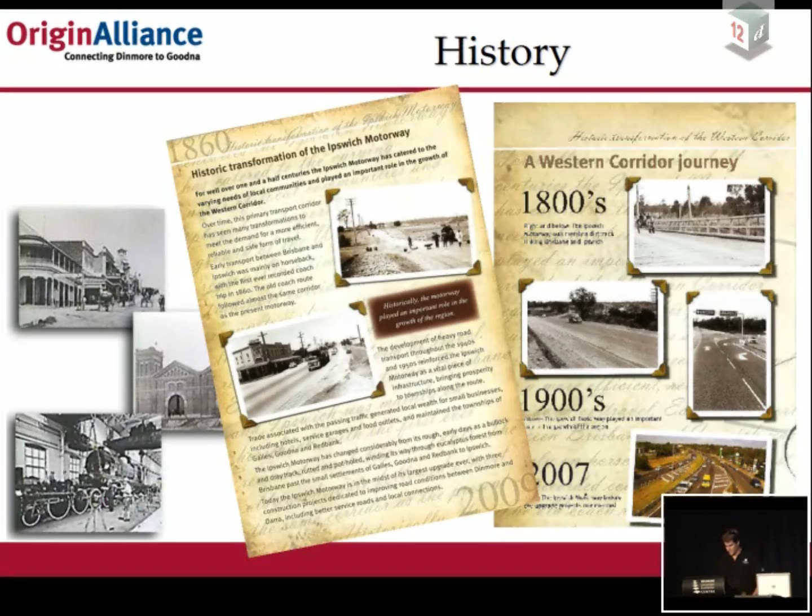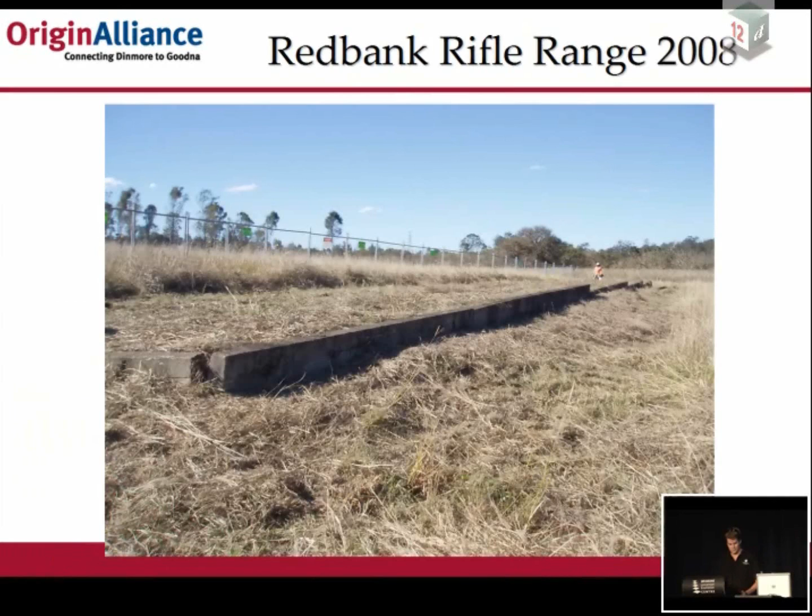The project is located approximately 25 kilometres from Brisbane CBD and consists of 8 kilometres of motorway widening from 4 to 6 lanes and has a provision for 8 in the future. It also includes over 15 kilometres of service roads. The project starts at the tie-in with the Ipswich Logan Interchange project, which is newly completed at Goodna, and finishes at the tie-ins with the Cunningham Highway, Warrego Highway and Brisbane Road near Dinmore.

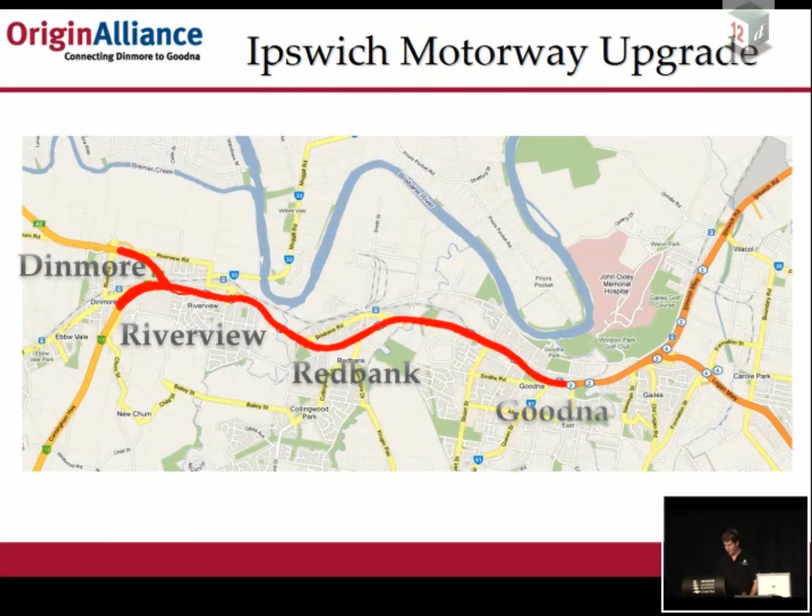We have a few layout photos here of the proposed design from the urban design guys. This is the western end of the project. We've got Warrego Highway to the north, Brisbane Road to the west and Cunningham Highway to the south there. Currently there are some right-hand exits. The current design is going to be all left-hand standard TMR exit off-ramps.

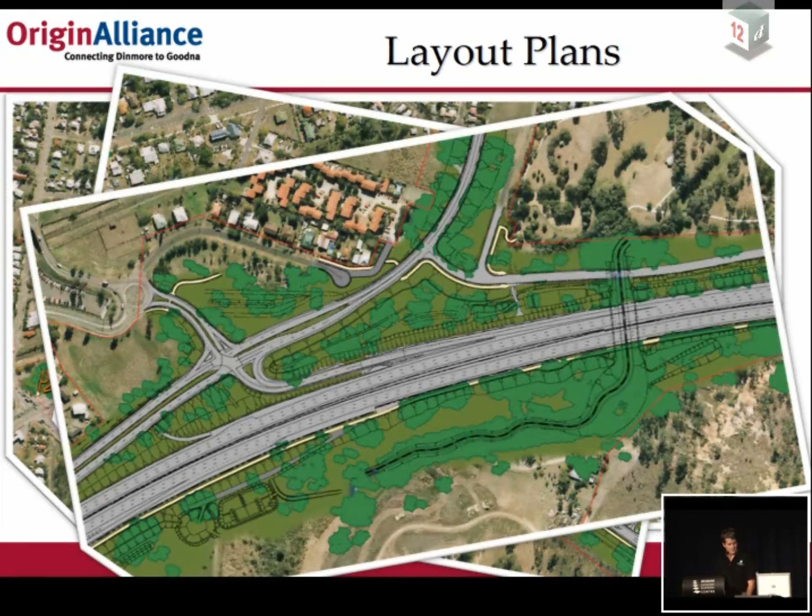We've got Redbank Shopping Centre in the centre with Mine Street Interchange. We've got the Redbank Sports Complex down to the bottom right here and a couple of local service roads. We've got the Goodna Creek rehabilitation because the new motorway dropped over the old one, and one of the on-ramps onto the motorway. And this is at the eastern end of the project at Goodna. We've got the Church Street Interchange and numerous pedestrian ramps.

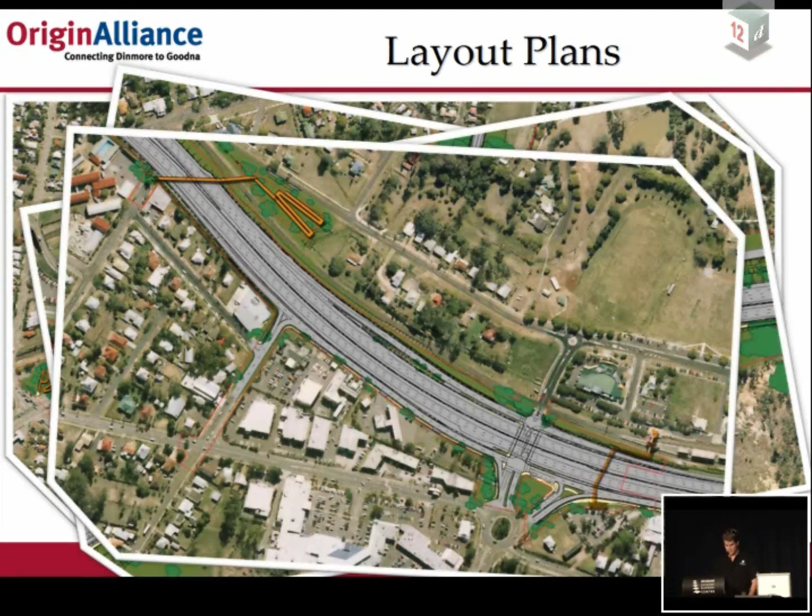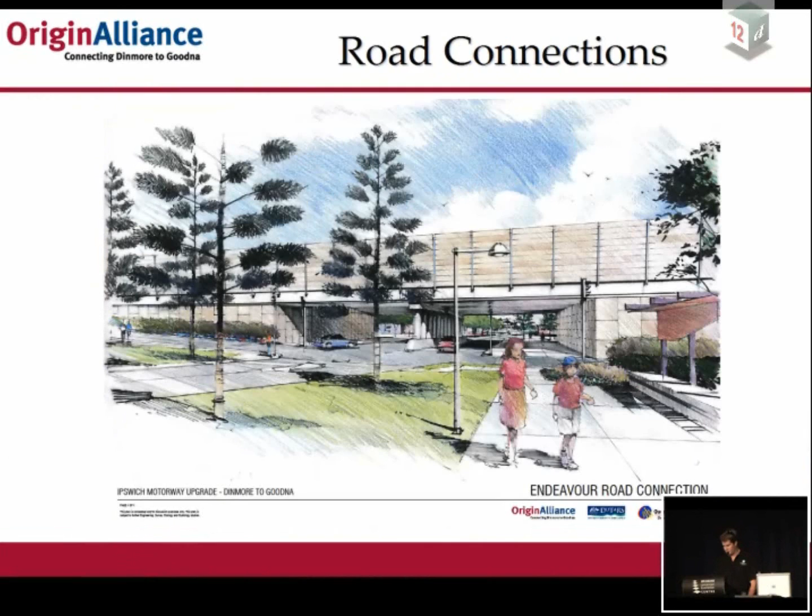Included in this project, obviously there are some major interchange upgrades with new and improved pedestrian and cycle paths. There will be new road and pedestrian bridges built for cross-motorway traffic, with numerous connection roads to separate the local and regional traffic. I think this is to take some of the 80,000 vehicles a day that they have travelling through the site.

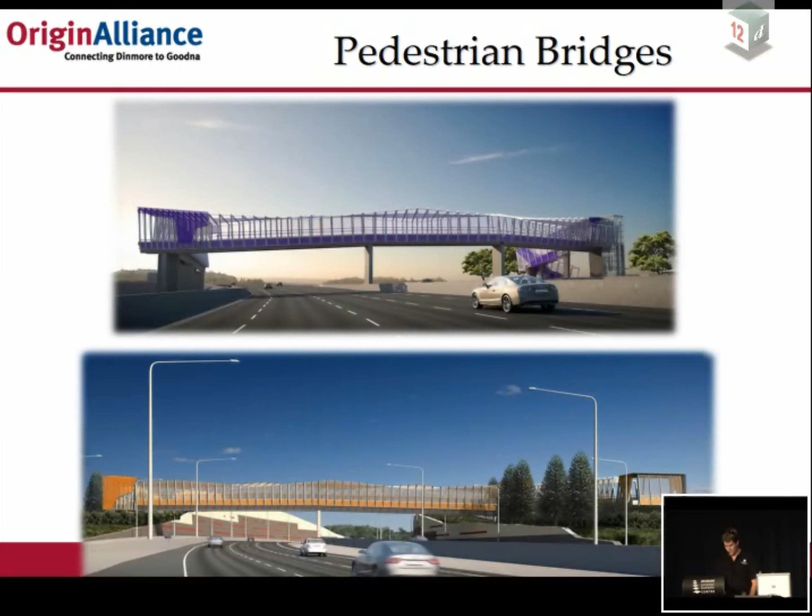A unique component of this project is the infilling of the abandoned coal mines in the areas of Redbank and Goodna to stabilise the ground. To undertake this process, this specially built concrete mixing plant was built. This tall white structure is visible on the southern side of the motorway and has been designed to produce the grout paste which is being injected into the old abandoned coal mines.

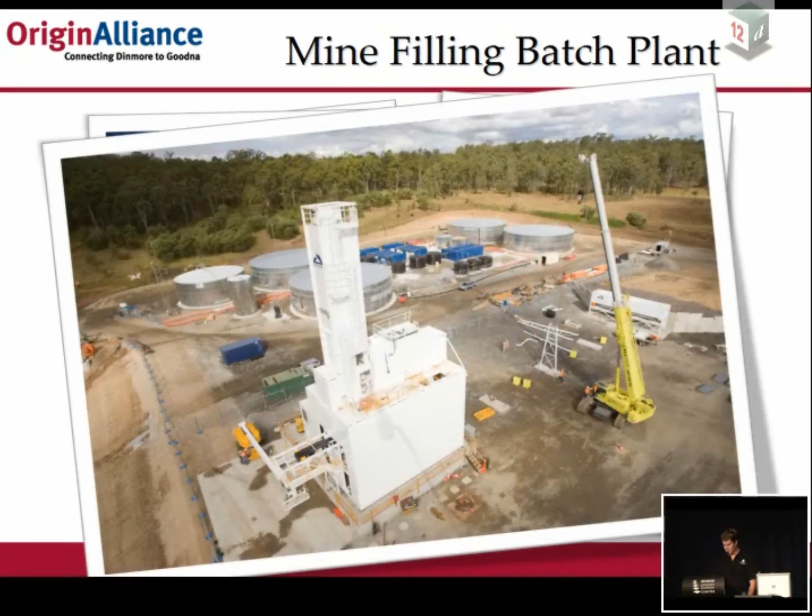The plant is capable of producing 2,000 cubic metres of paste product per day. It's transported to site in concrete trucks. The paste is then discharged under pressure into the base of the mines, filling the voids and stabilising the ground beneath the new motorway.

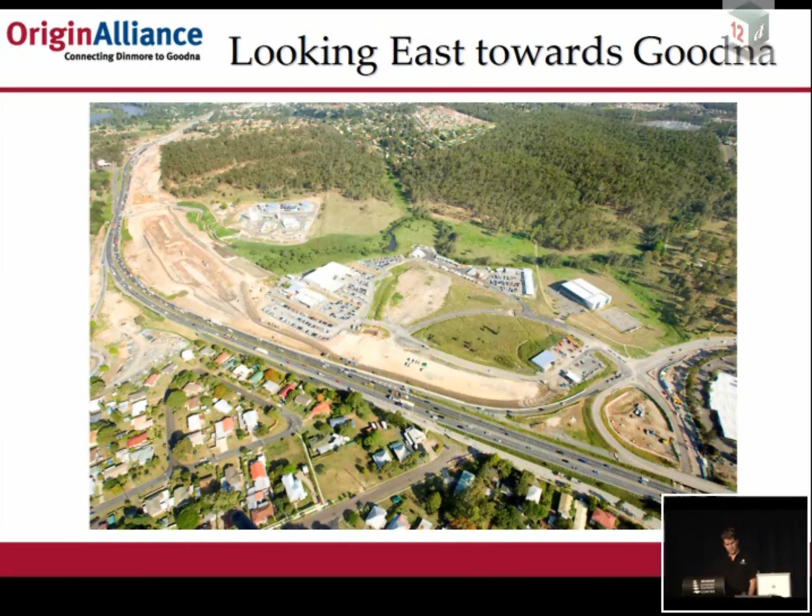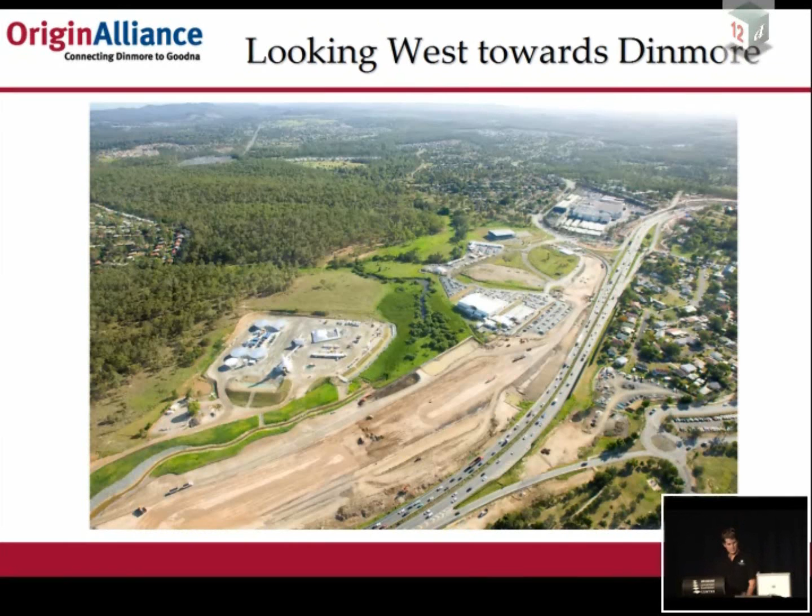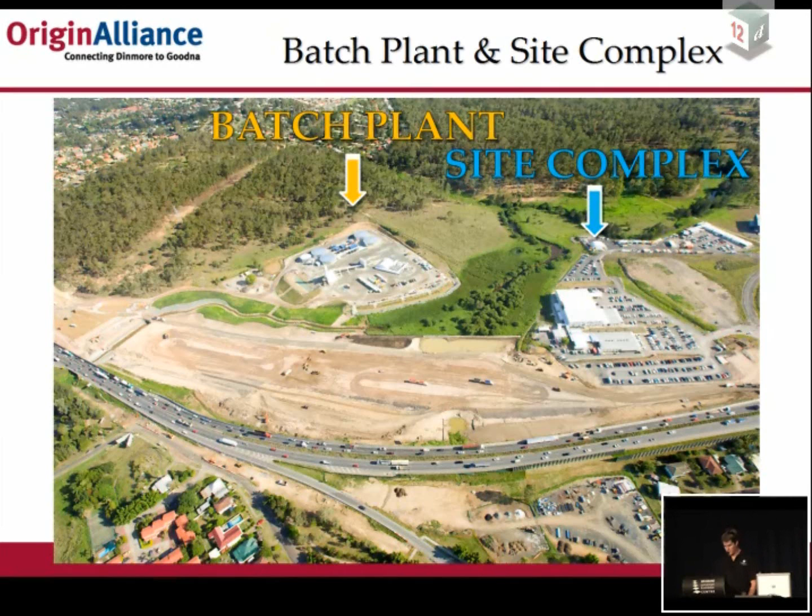At the start of 2009, the Origin Alliance relocated the design and construction staff from the CBD to the construction site office at Redbank. This purpose-built complex allowed for better collaboration between the design teams and the construction teams. And I believe this has been beneficial for the designers to be able to step out on site at the blink of an eye and go and visit the issues present on site.

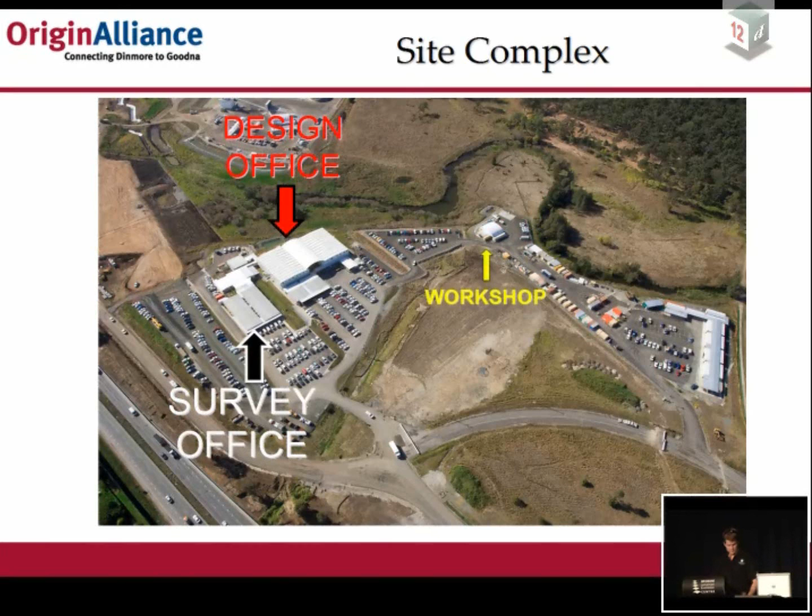Currently, the site office contains over 350 staff, 130 of which make up the design team. So the design team comprises the geotech, PUP, drainage, drafting and roading engineers. At the peak of the project, we probably had 10 road designers on board, so we had a combination of software users.

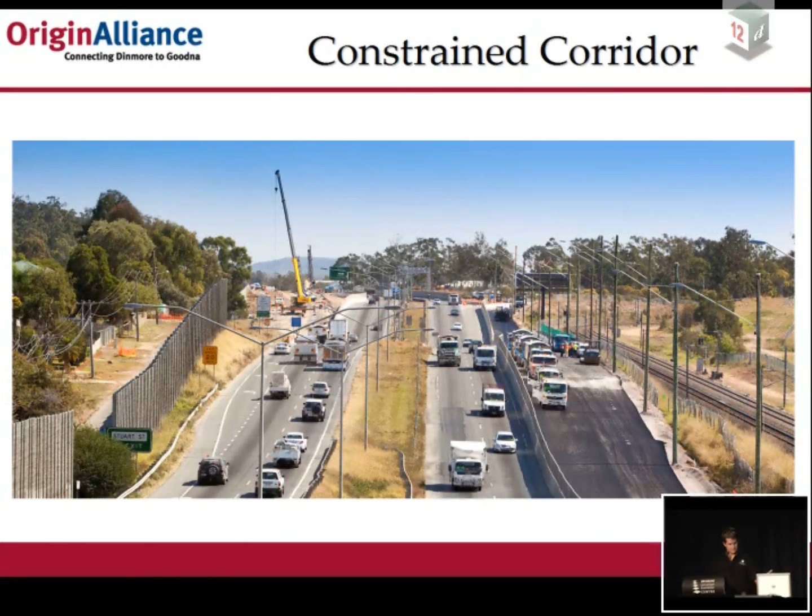The Ipswich Motorway corridor, as you can see, is incredibly constrained between numerous schools, houses, abandoned coal mines, shopping centres, and we couldn't really call it constrained if we didn't have a Queensland rail corridor to contend with. This was a couple of months ago, early December I believe, and it's a new side track, if you like, to push the westbound traffic across so we can start the motorway construction.

So this is where the detailed design project gets interesting. We split the road design across two different software programs, 12D and MX. Now I can only guess what you're thinking, but we managed to stay civil towards each other, and we worked together to create a complete model.

At the project startup, we investigated completing the design model in three ways. Firstly, it was the traditional MX environment, which has a long-running history in Queensland motorway design. But this was at the peak of the design demand in Brisbane, and we couldn't find enough experienced designers.

Secondly, we looked at a complete 12D environment. Now, as we all know, 12D is new to detailed motorway design, and I think we're looking to have some experience shown and some industry standards set. So we also struggled with obtaining some experienced 12D motorway designers.

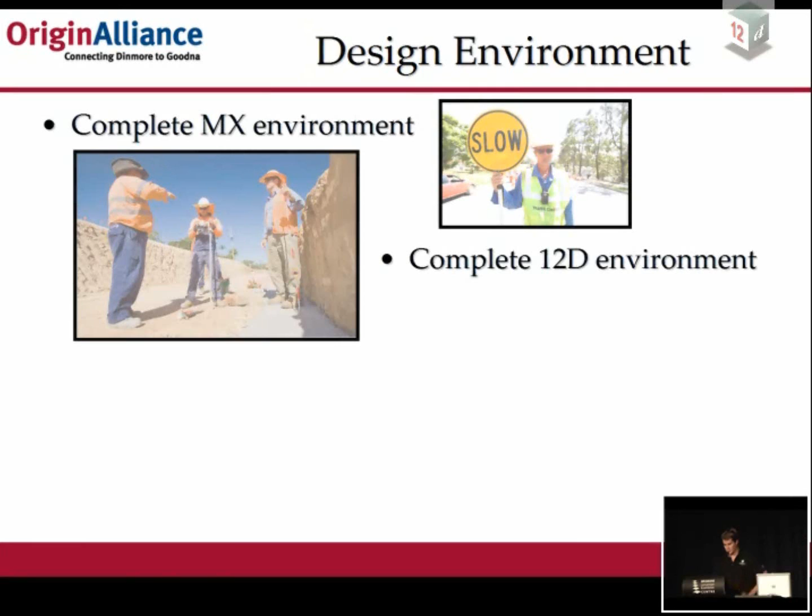So thirdly, we came to a combined environment, and this was to get the benefits out of both programs. Obviously MX has a long-running history in motorway design, but we also wanted to look towards the future and develop 12D.

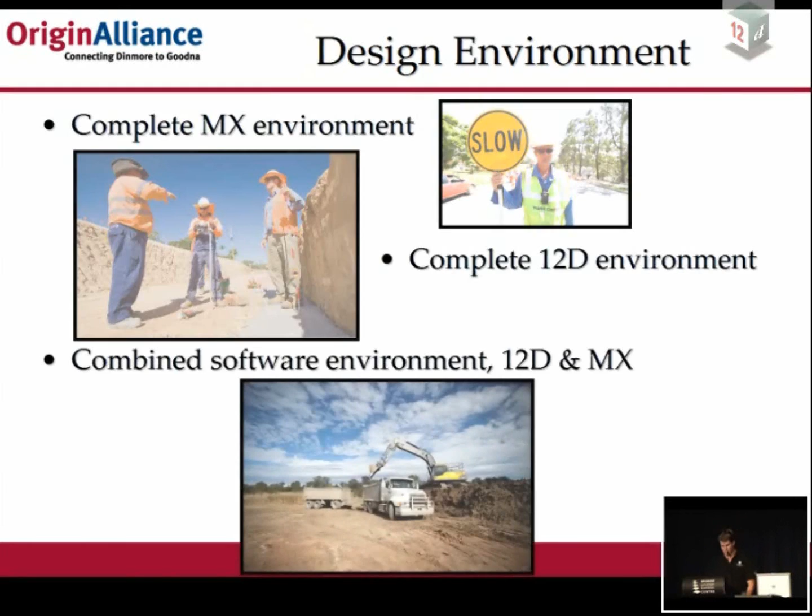The 12D MX split enabled the road team to overcome a few issues we encountered. One of them was resourcing. I mentioned that we struggled to get enough experienced staff in either MX or 12D. We had the issue of the lack of experienced 12D motorway designers available within the industry, and also an unknown 12D capability on delivering a large detailed design motorway project.

But on the other end of the scale, it enabled the team to increase the 12D designers' knowledge in motorway design and utilise the skills to the best of their ability, so we used the 12D guys for what they were good at, and the MX guys as well. And it obviously increased our knowledge on 12D delivery capability on a large motorway project without the increased risk of completing the entire design in one package on such a tight time frame.

So to get the two software programs to work together, we required a set of design standards that would work in both software programs. One of the main differences between the two programs that is directly related to the standards is the string coding. MX has a 4-character limit, whilst 12D, as you all know, has a varied length of string naming, and there could be some wonderful names coming out of some designers.

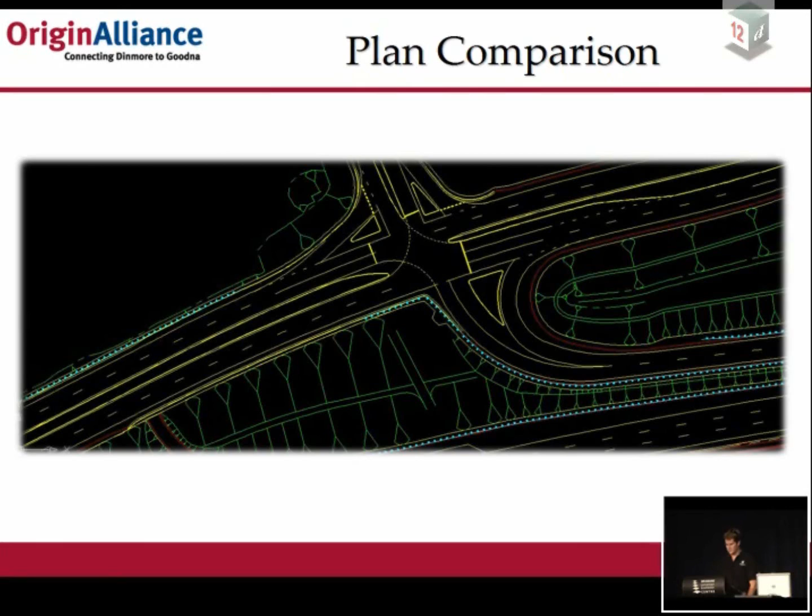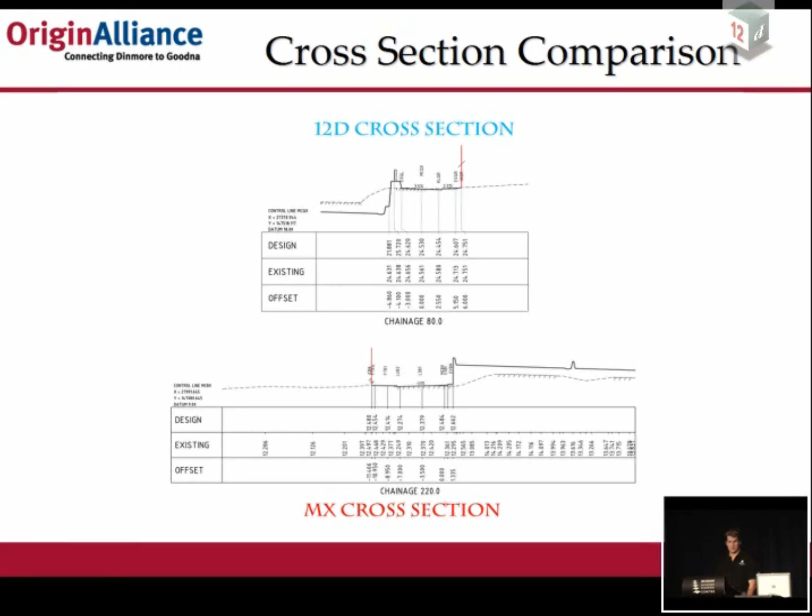Long section and cross section plots also had to look the same. This was a little more difficult, as both programs have different restrictions on the placement of items. For example, the super elevation line in 12D can only be located at the bottom of the plot graph. Don't ask me why this was a problem, but it was at the initial start-up stage.

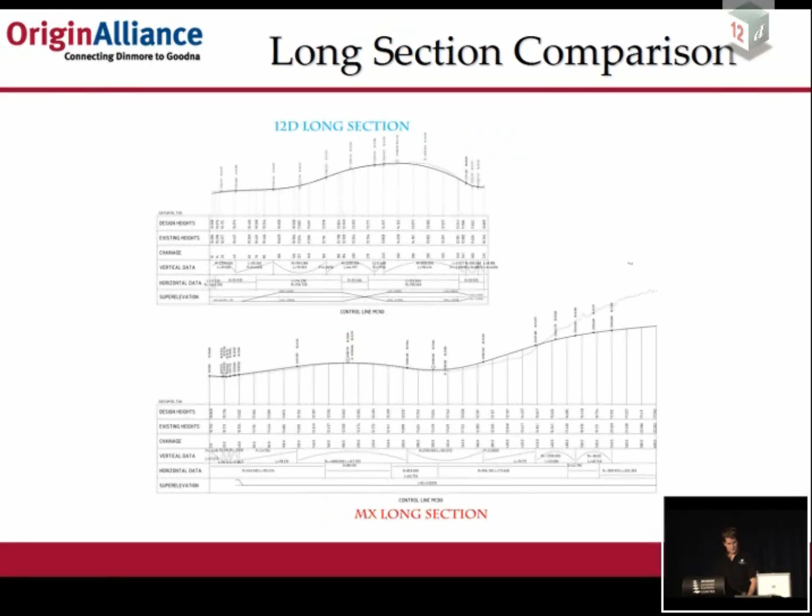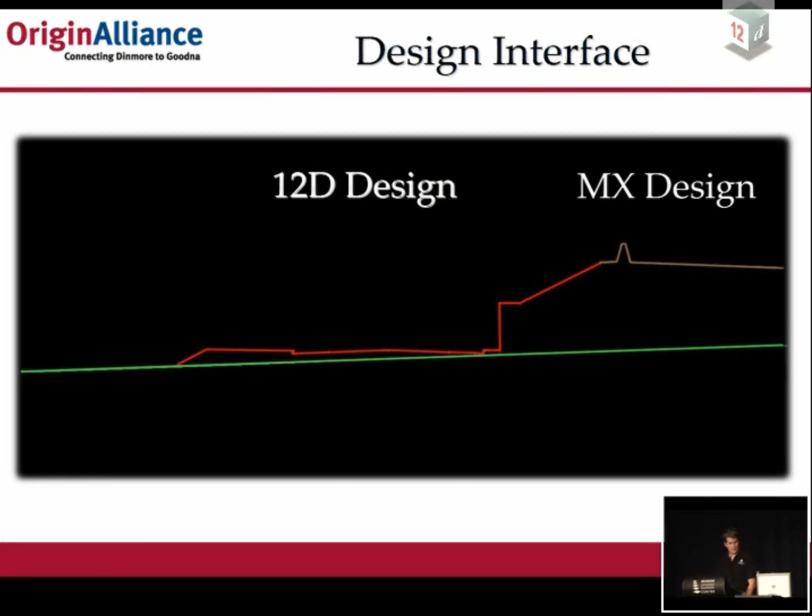Now the design interface location was an ongoing decision throughout the project. In most cases, the 12D design controlled everything outside the verge string on the main alignment. This obviously varied if the main line wasn't interfacing with any 12D service road. It obviously had its own interface, but the design interface still changes on a daily basis as we progress the final design.

Capturing design changes has to be one of the most important items when completing any design. Both programs complete this in different ways. MX typically locates theirs at the top of an input file, whilst in 12D version 8 it's located in the description panel. On this project we decided that two different locations was not going to work, so we created an Excel and combined the two.

This spreadsheet was also developed further to include model status, issues and comments, to include to the surveyors when they received our 3D model, so design lots could be tracked, and instead of receiving a complete model they got some idea about what road was at what status.

Data sharing between MX and 12D was incredibly important, considering MX was completing half the road design and 12D the other half. Design data was shared between the two programs on an as-necessary basis, and to make this sharing seamless and consistent for the designers, we created a 12D project, which is shown. It basically has a very simple process: opens up, cleans models, reads in the latest GENIO, and saves and exits, so that that file was referenced to all 12D designers. So at any one point, the one update, which was run on a separate computer, could be updated, and everyone was looking at the latest data.

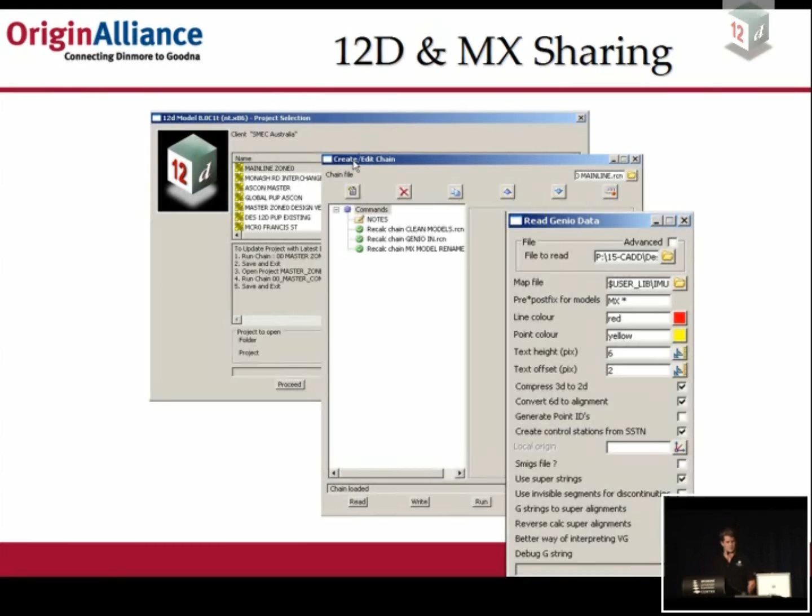The 12D master project that we set up as well had a very similar process for the MX team. They had, it would create a GENIO file every time that the road design was updated to a complete model. These files were located in the same location every time, and this allowed the current design to always be in the same location and prevented old designs being utilised by different designers.

Now, the 12D master project we set up combined the 12D and MX road designs, and from there we created a complete 3D model by creating a new model, cleaning, very similar to an MX input file where they do a delete and recreate. We had a very similar process within the master 12D project. This enabled the sharing to the PUP and drainage teams to have a complete road design model.

This process occurred when the current design had been signed off, which meant that the road design model was to a level of finish that was acceptable for other teams to be designing off. Initially, in the early stages of the project, the design was developing rather quickly, and the drainage and PUP teams didn't like the design changing 5 times a day, especially when a road moved 5 metres.

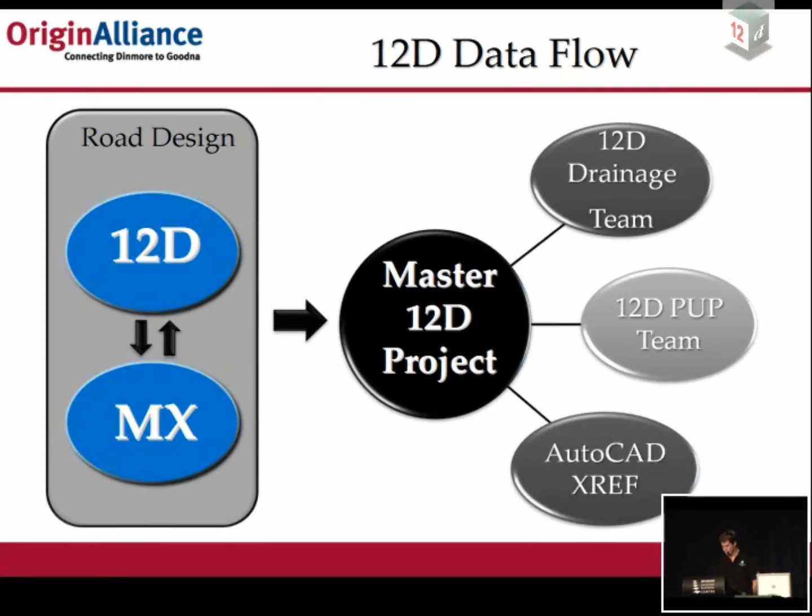The master 12D project also produced plan, long section and cross section plots for the 12D component of the project, so it meant that one project was open and we had the latest data at any one time. Model sharing from within the 12D environment was a little trickier than first thought. The 12D road design was split into 10 different design packages. This allowed for numerous 12D designers to be working on different parts of the project at any one time. Unlike MX, 12D projects sit on the network and are live.

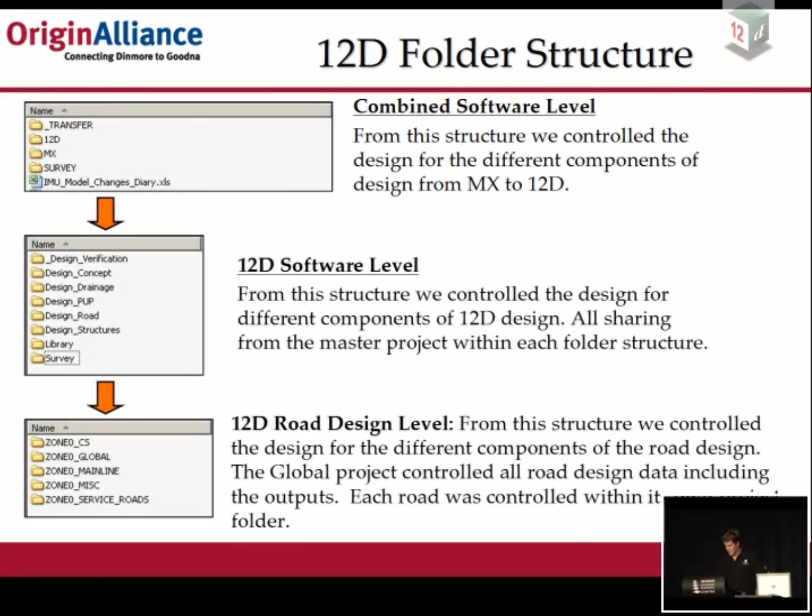12D obviously sits on the network. This obviously takes full advantage of its sharing capability. MX, however, can develop designs locally, then upload to the network for inclusion into their master input file, this allowing an output from the network at any time without the model being half completed.

The issue we had with the Master 12D project was that the individual road projects shared data directly into the live project. This obviously meant that an output from the Master project at any time could result in a half-designed road. Now, detailed designs and detailed design area managers like to see the designs stable and not change on a click of a button.

So one of the issues we had with this was that it was okay if you're already in the master project because you didn't have to synchronise the project that had changed if it was complete in the first place. But currently in 12D, all 12D projects synchronise automatically on startup. I believe this is somewhere where we could probably change in the future and have it as an optional feature so that it just opened the project and then you can synchronise on a click of a button.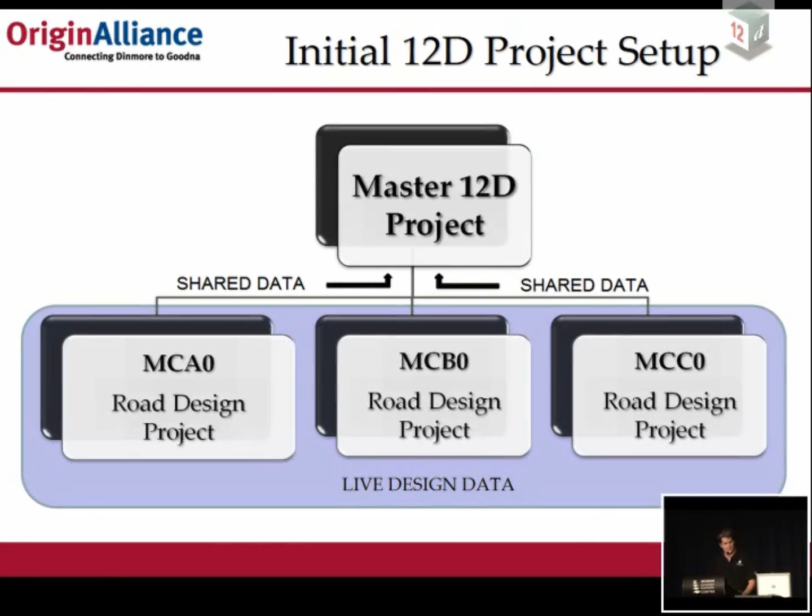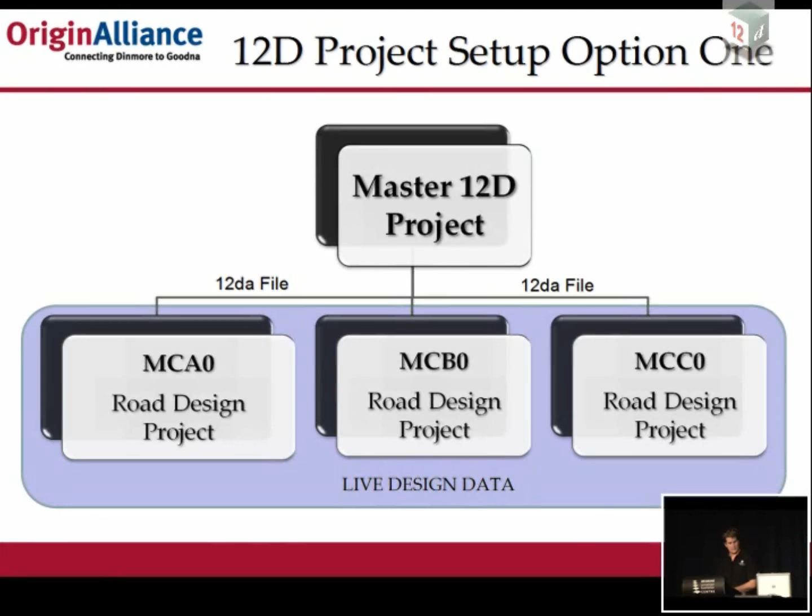We investigated 2 options to overcome this issue. The first being that the individual road projects were to write a 12DA file to an input directory, and the master 12D project simply read this data in. The issue with this is the designer had to clean the previous models before reading the current data in, and then had to sort out which models went under what views. Now, in the master project, I can tell you there's a lot of models there.

The second option, and the one that we're using to overcome this problem, is a 2-tiered folder structure. This is set up so that nothing is shared out of the live development projects, which is down the bottom there. What we do is we write a simple chain which writes a 12DA file from a view. This 12DA file sits in an input directory in a control project. The designer then has his or her responsibility to go to this control project, run a chain which basically cleans the project, reads the latest data and then makes it available for sharing.

Now, the only real change you had to do in this project was if any new models were added, you had to actually go in and ensure that they're all shared. This meant that the master project then, unless models were added, updated automatically, and the static design data was always a complete model.

So, yeah, essentially then at any time we could really just output the XREFs, long sections, cross sections out of the master without a road designer being halfway down the road and it coming through on master and the XREF being half finished.

So one of the slight concerns I have with the Master 12D project is that when adding and removing models from the model list, there's no way of filtering or ordering the models that you have, so for us we have a process in place that tries to tidy that up, and that is to remove all models from a particular project and then re-add them even if one model is out, that way your model list didn't get complicated and messed up. So hopefully in the future we should be able to maybe order the models shared into a project by clicking and reorganising them.

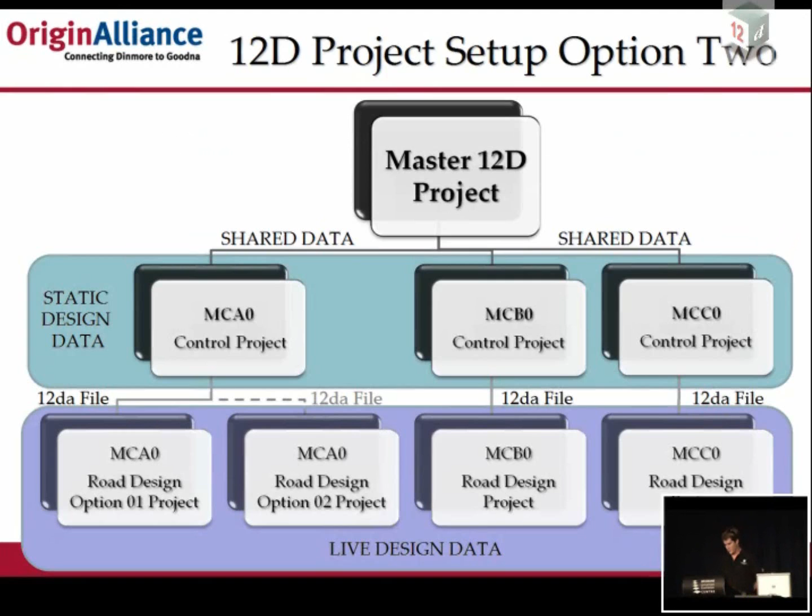Now, during the course of the startup, we developed a number of time-saving tools to help designers document and report the design consistently, so that sharing projects and sharing resources across would be seamless. The road design was set out from the start to have a very basic road template, which included basic road strings and shoulders. From there, we utilised UltraEdit's capabilities to insert multiple lines of code for standard components of design, such as curbs, walls and footpaths.

We customised the UltraEdit display to allow the designers to visually see the command lines in different colours in the coding. As well as that, we had an insert template functionality, which we set up so that at any time, if you needed to insert a wall or a certain type of curb, you just double-clicked on the line of code, and it inserted up to 10 lines or more of code at one time. All it required was the designer to modify some string names and include the changes he needed.

Coming to changes and string names, the find and replace capability was very powerful, and I can tell you when trying to find something in over 1,000 lines of code, it's a lot easier than scrolling through the current version 8 MTF. UltraEdit also has a compare function, which allowed the designers to compare old MTFs with current MTFs, and especially the options developed in the background, so that designers could have someone working on an option and then compare the two MTFs and then, hopefully, cut the design simply into the current one.

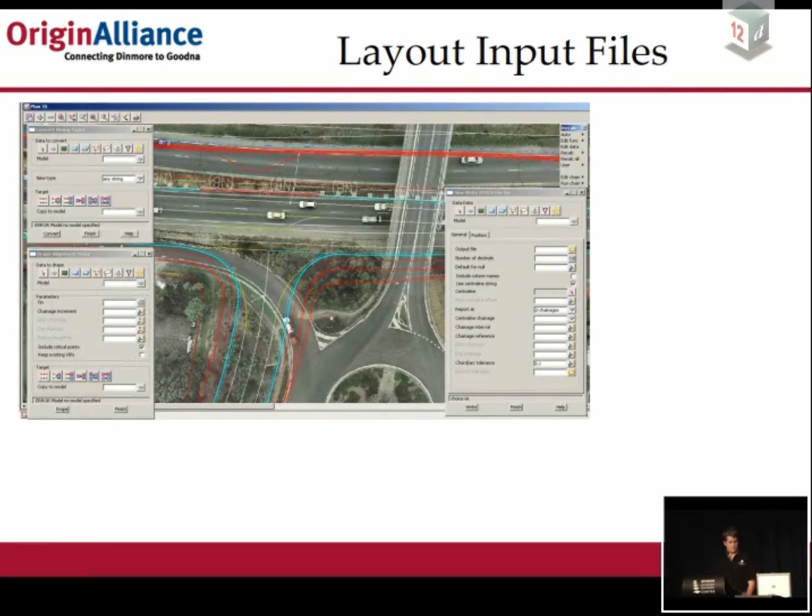We utilised layout input files and defaults within 12D to help designers follow the correct procedures when outputting data for design reports, aquaplaning spreadsheets, and sight distance checks. This particular layout input file essentially helped with the output of the data to the aquaplaning spreadsheet that we had set up.

Essentially it was a superstring, draped on the alignment and reported at every metre. This allowed us to satisfy a TMR standard of checking that the depth change over a metre wasn't more than 0.5 mil.

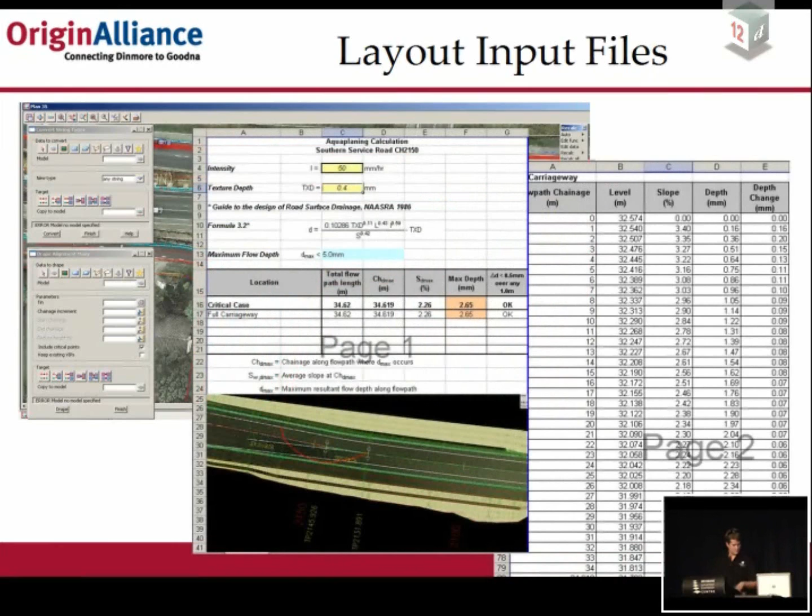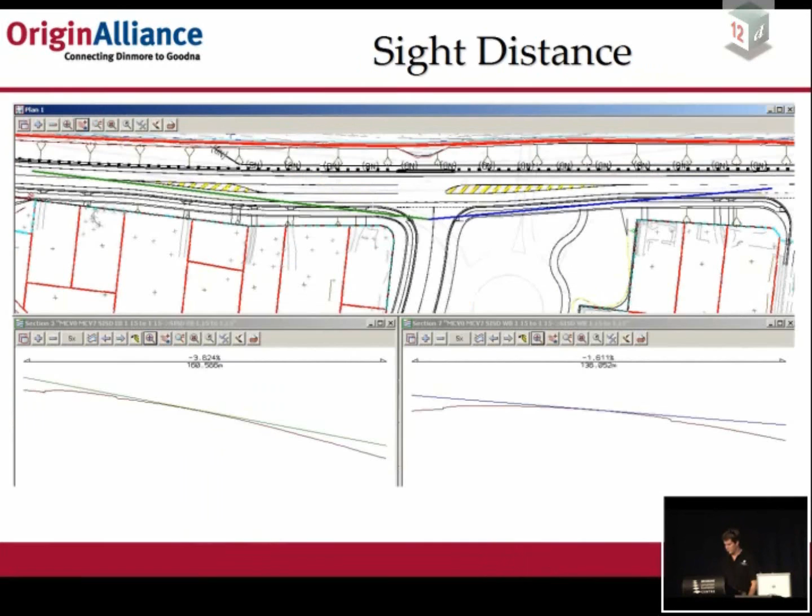The macro we used was developed right at the start of the project by Mike Jensen. This helped us produce intersection sight distance checks and ensure they were recalculable when the design changed. This particular function allows the user to check or produce SISD, ASD and MGSD sight distance checks in relation to a control line, chainage and offset against a particular tin.

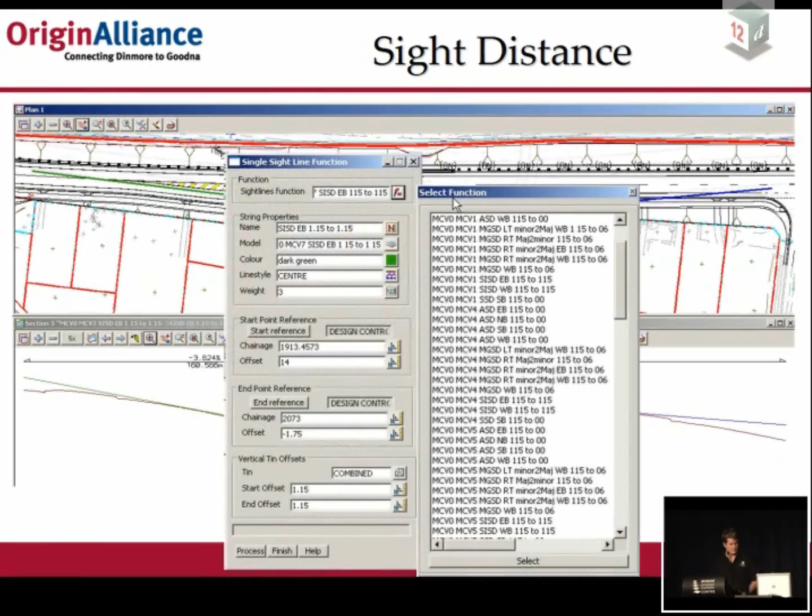You can see the list of functions along this road in particular. It was very easy to recalc those and reproduce the reports, and screen dumps were produced to go into the design reports at the request of the engineers.

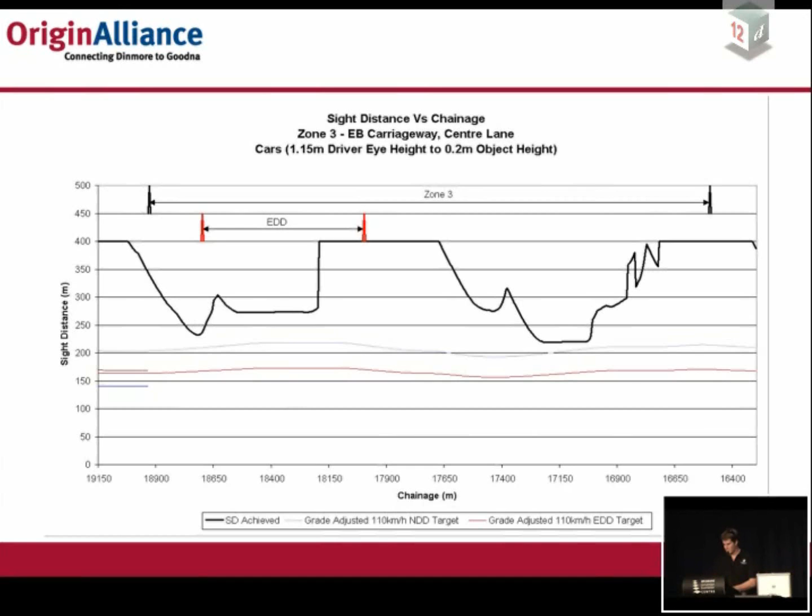A great tool I'd like to see developed within 12D is the sight distance reported in a graph-like function. This function allows the designer to see the deficiencies against certain design criteria. Having this dynamically linked to a plan and perspective view might be asking too much, but I have seen some of Mike's graphs and they look pretty impressive.

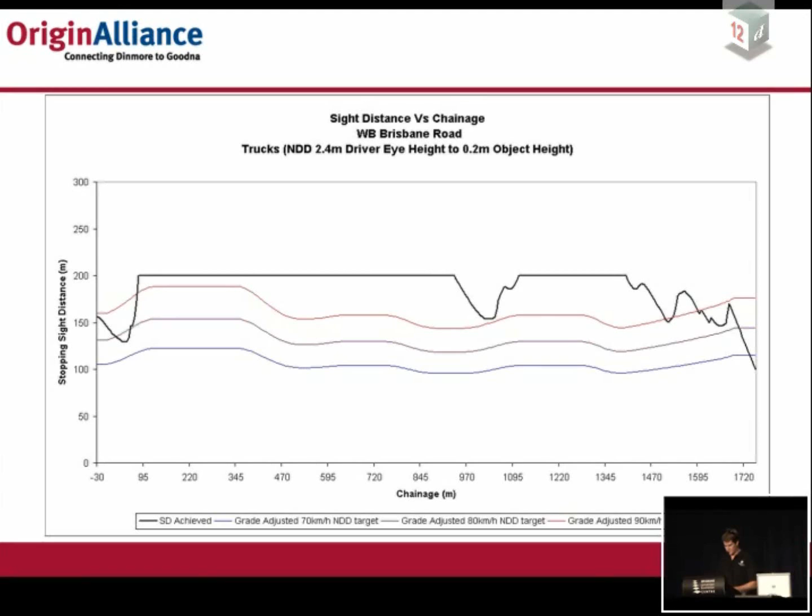Chain files were used in both individual road design and in the master project in a number of ways to help automate the design and outputs. Batch files were also used within chains to help supersede and move data before overriding.

On this project, we've been transferring the complete 3D model to the surveyors. This allows the survey team to interrogate the full design with 12D field without missing design components. The issue with this is that the survey team often receive data before it had been signed off, and is always at risk of being constructed before being signed off.

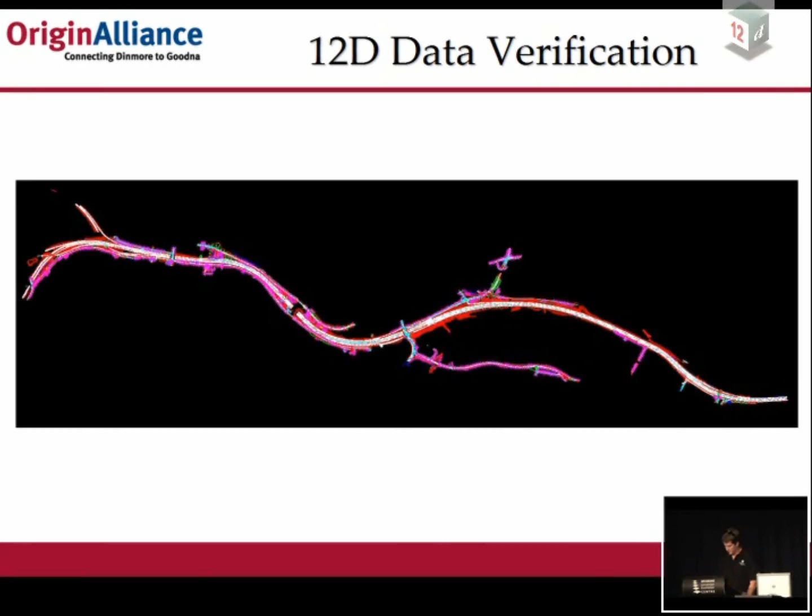Before any data was sent to the surveyor, we verified it in a standalone 12D project. This 12D project reads in the 12DA and GNA files from the master projects. This project ensures the data is complete and the file contains all the information required at the time of setting out. The 12DA file produced from this project is accompanied with the design changes diary, which allows the surveyors to interrogate the model with detailed changes and highlights the status of certain roads.

In the future, I'd like to see some way of being able to control the 3D model. It's a very open beast, if you like, in terms of how we look at controlling the 3D data to the surveyor. A simple way may be to highlight the design in green, orange and red to show items that are for construction, on hold, or not for construction. I'm not sure how this will be done, but hopefully the 12D programmers might be able to help out.

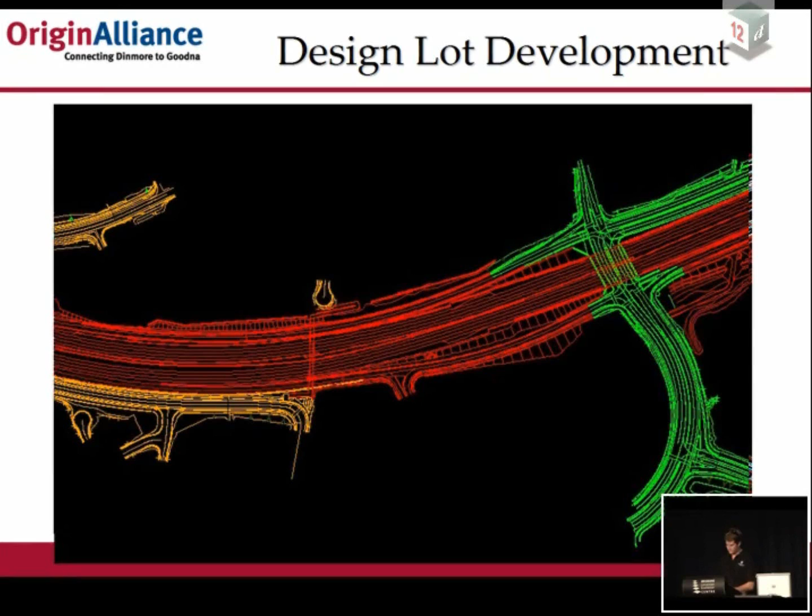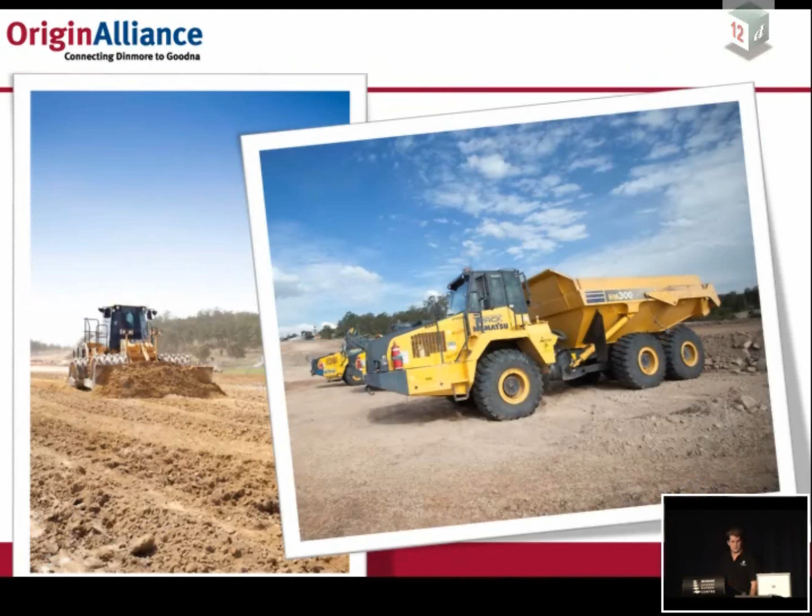Over the past 20 months on the Ipswich Motorway upgrade project, for me personally, it has been a huge learning curve on managing 12D data on such a large detailed design project. The key thing I can take away with me is that good organised data management is the key to success in any project. Thank you.